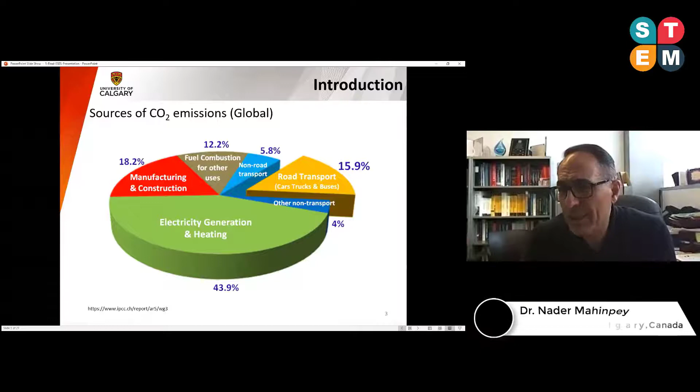From the sustainability and environmental impact side, greenhouse gases, as we know, are making their footprint in our daily life. Where I'm living in Canada, in the province of Alberta, we have a lot of gas emissions. It's a very energy-rich province, so we have lots of oil and gas and also other industries there.

As you can see in this graph, about 44% globally—might be different country by country, province by province, city by city—is responsible for electricity generation. Then we have manufacturing, fuel combustion, road transport. There are different portions of the emissions.

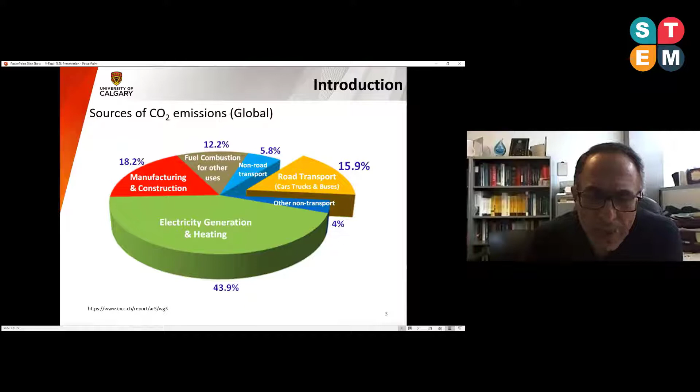In Alberta, obviously it's electricity, because we are consuming about 60% coal in our power generation, and also oil and gas, and other energy sectors.

So generally speaking, CO2 capture—CO2 is a greenhouse gas, responsible, and the most abundant one on the earth.

There are three general ways to capture: we call it post-combustion, pre-combustion, and oxy-fuel. Post-combustion is when you produce the CO2 and then you try to deal with it afterwards. Pre-combustion is when, before you produce syngas or any other gases to send for combustion to produce energy, you try to deal with the CO2.

The oxy-fuel combustion is when you use pure oxygen. As a matter of using pure oxygen, you produce a very high concentration of CO2 that allows you to separate the CO2 very easily, because the other gas would be water vapor. You can easily condense it, and then you end up with pure CO2, which is very desirable, because then you can sequester or do whatever with it.

So the chemical looping is related to oxy-fuel. In oxy-fuel, as I mentioned, you need pure oxygen. Getting pure oxygen is very difficult and very, very costly. Air separation is a different technology on that front.

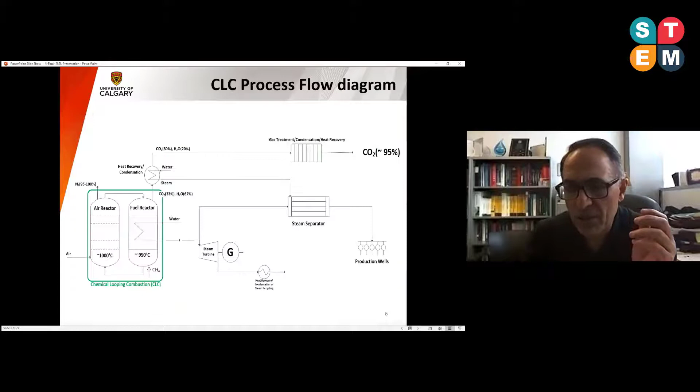So today I'll briefly discuss the aerogel material that we are using. If you remember, I mentioned the oxygen carriers are solid materials that circulate between these two reactors, eliminating the need for provisions of air or oxygen.

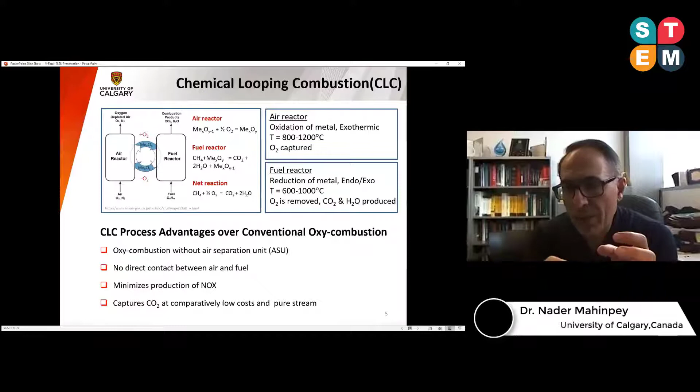So basically, the oxygen through the process is obtained from these solid materials. Those solid materials are called oxygen carriers.

The material that we are using as an aerogel preparation was a patent that we made with one of my postdocs. It sounds very promising because it creates a lot of physical properties that are very desirable for oxygen carriers. So aerogel, that's the terminology.

I'm going to mention in the next slide what those are and how you make it. Usually they give us a very high surface area, about 500 meters squared per gram. They give a very high pore volume, like about 2 cc per gram, a very low density, and all this creates very small size particles. We call them nano size particles, usually less than 500 nanometers.

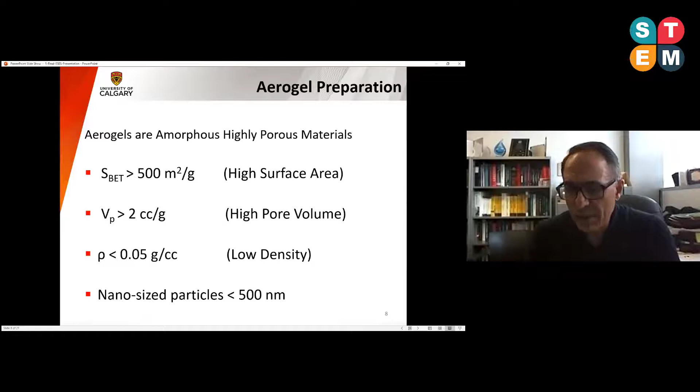So the way that we make it, we prepare it and go through a process. If you use water, we call it hydrogel. If you use alcohol, it's called alcogel. Depending on the drying process, it's called xerogel or aerogel. If you go through a slow drying process, it's called xerogel. The one we are using we call aerogel, going through a supercritical fast drying. With high pressure, we try to do it very quickly, and that's what you get as your aerogel as a result of that supercritical fast drying.

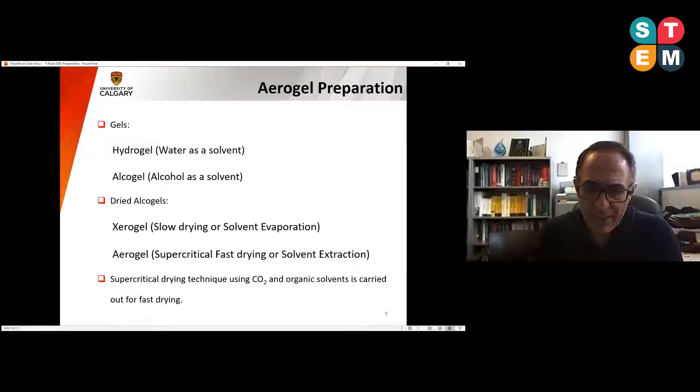I won't get into the detail of that one, but as an example, you can use metal alkoxide. You dissolve it in alcohol and then you hydrolyze it. When we say hydrolyze, you add water into it very slowly, and as a result it gets hydrolyzed, and then you get the desirable molecules, in this case MOH, and then they react and make your aerogel.

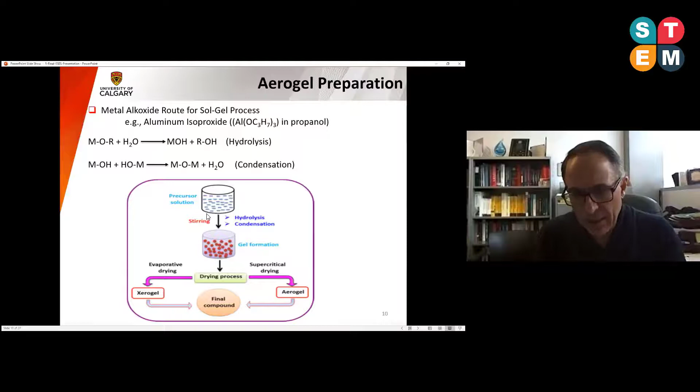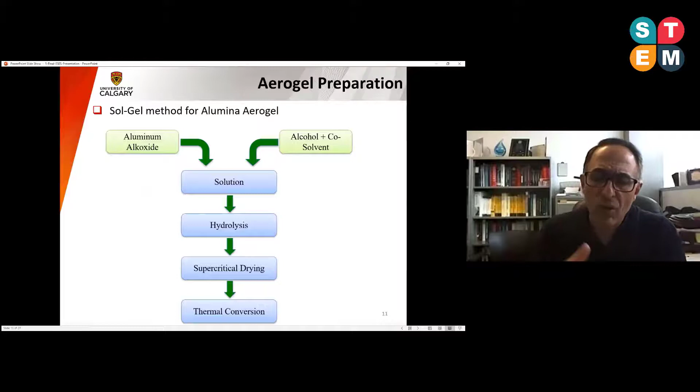This cartoon shows a little bit of how things are conducted. So in a nutshell, as I mentioned, you make your aluminum and your solvent, then you dissolve it, hydrolyze it, dry it, calcinate it, and then you make your aerogel.

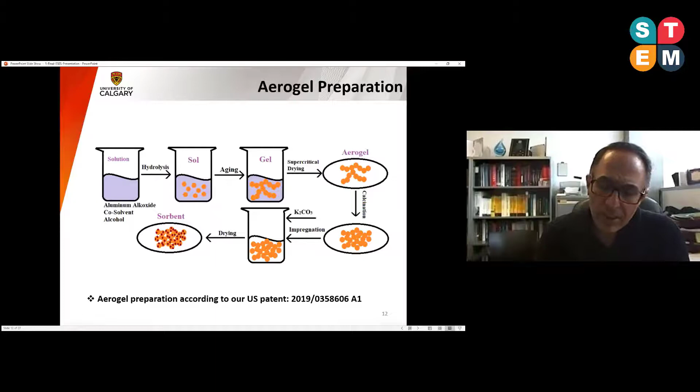Then you impregnate what you need to do. For example, you need the nickel oxide, the iron oxide, or in another case we use potassium carbonate for carbon capture. So then it sits on that support and makes your material, either a catalyst or an oxygen carrier. That shows a cartoon of that.

That's how xerogel and aerogel look like. So this is an XRD. When we show that one, it means that they have a very amorphous structure, and that's the structure we expect aerogel to have. Otherwise, we shouldn't have that kind of disparity and changes in the XRD images.

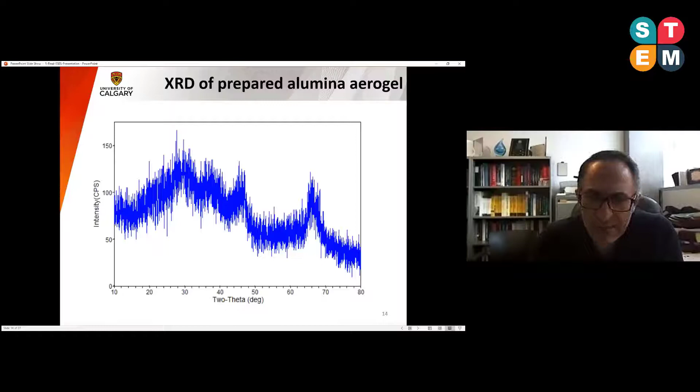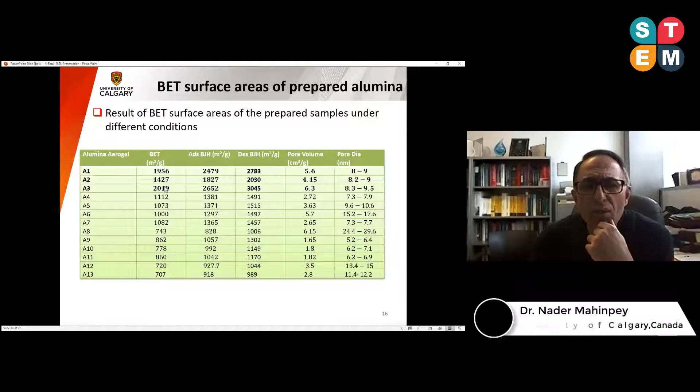These are the materials that we made, at different temperatures, different materials. The samples we made, I'm going to mention what those are, are A1, A2, A3. The significance of that is the surface area you see, somewhere between 1,500 to 2,000 meters squared per gram. These are all desirable properties when we are talking about the support that contributes to the oxygen properties of the oxygen carriers.

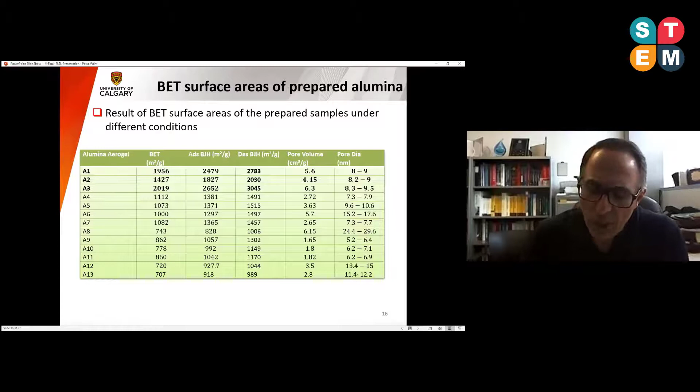This image shows a nitrogen adsorption-desorption isotherm for alumina aerogel. Basically, by these you can find what kind of textural characteristics you have, like different types, type 1, 2, 3, 4. When you know the type of the material, you can estimate the oxygen capacity of the system.

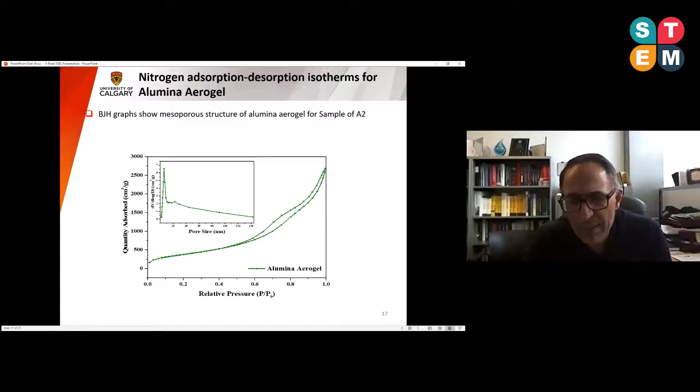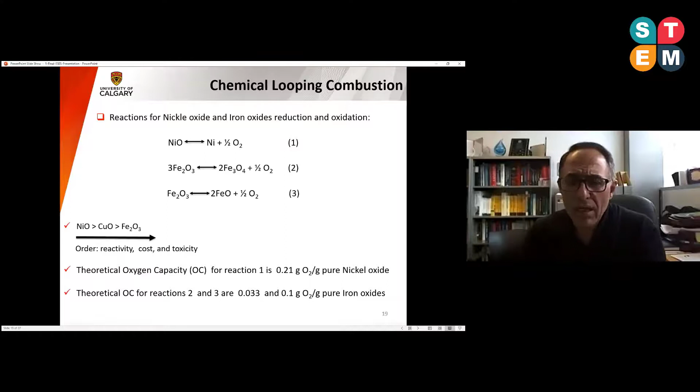This section had to do with the preparation of the aerogel. The next section uses thermogravimetric analysis to see how oxygen transfer works between the fuel and the oxygen carrier. As I mentioned, we used nickel oxide and ferrous oxide for this, impregnated on the aerogel to make the materials for our experiments.

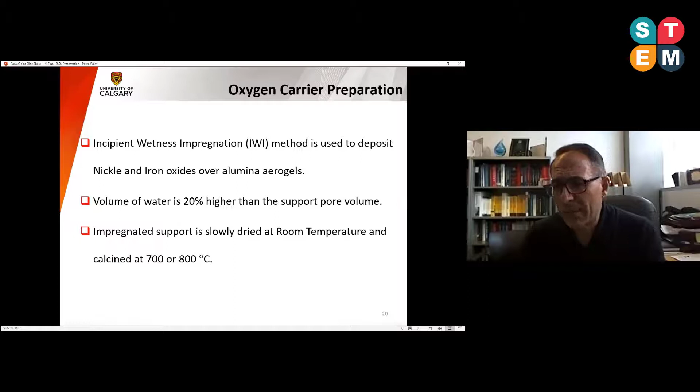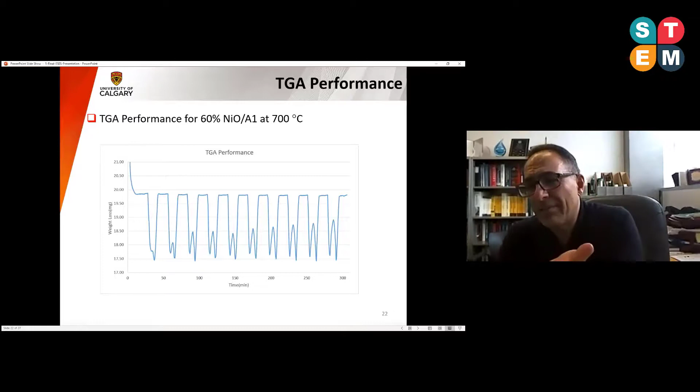So that shows how things progress with nickel oxide. These small peaks are what we call coke formation, which has to do with the nature of the oxygen carrier. Nickel oxides are prone to produce a lot of coke. Coke is bad because it creates solid carbon layers that you need to remove, so ideally you want zero coke formation.

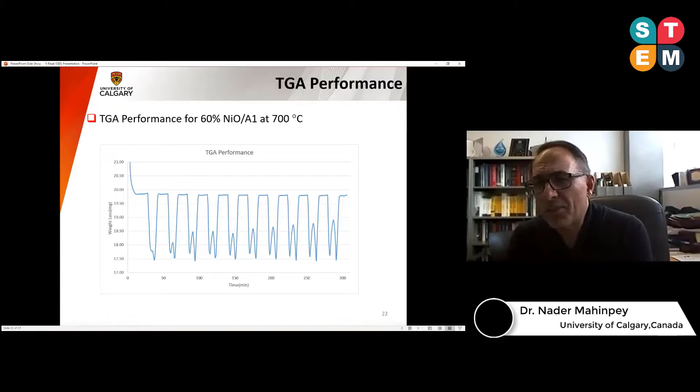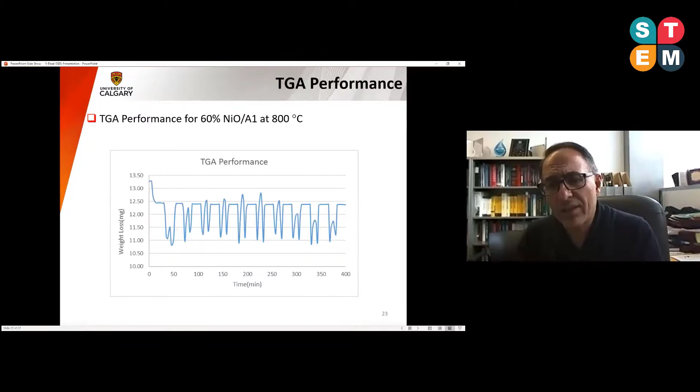That's what our research was about. We had another presentation this morning showing we can use other metals to reduce coke formation almost to zero, like tungsten, which brings it to zero. These are different temperatures - the previous one was 700, this is 800, and as temperature increases, coke formation increases as well.

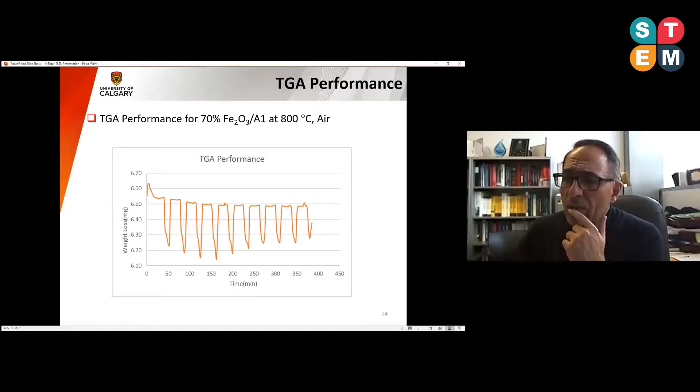This is another oxygen carrier - we use ferric oxide here. Ferric oxide is much less coke-producing than nickel oxide.

In conclusion, we showed preparation of alumina aerogel. We have done other aerogels as well, like zirconia aerogel and silica aerogel, but in this presentation I just presented alumina aerogel. That showed the properties I mentioned, in terms of surface area, density, and pore diameter.

This seems to be desirable to be linked to the oxygen carrier, basically acting as a support for it. We used the impregnation method to impregnate the material, whether nickel or iron, into the support, and then we did the experiments, and you saw how that gets done.

So all in all, in this research we are trying to find the optimal conditions and the best oxygen carriers for chemical looping combustion. Chemical looping combustion is a very promising technology for carbon capture, and the bottleneck of this technology is the oxygen carriers. If we can find a desirable and optimal material for this technology, we can push it toward commercialization.